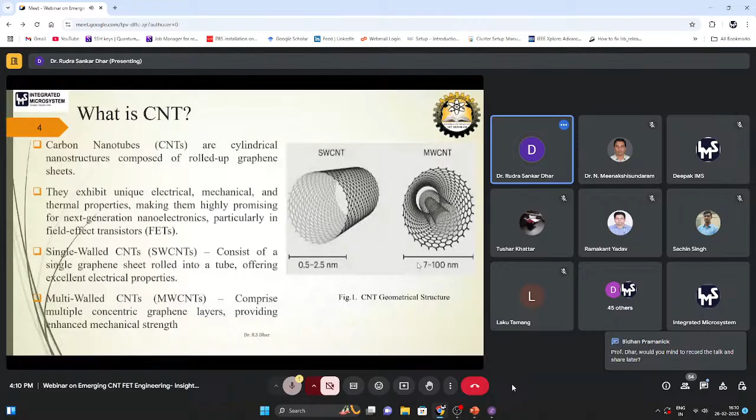CNT FET. So a special feature of this molecular structure is that it is expected to have good ballistic transport because it has nanowire dimensions, and scalability is quite good. So we can scale down the material-based device to a shorter gate length. It is obviously giving a high electron mobility. It has faster switching speed, low power consumption, and good thermal conductivity as such.

So basically, considering the device properties and so on, we can say that CNT is a good material to be utilized as a field effect transistor, and therefore people have also recently been looking into CNT as an option for alternate silicon materials and things like that. So we figured this out as an alternative option, and therefore we were thinking to design the FET using QuantumATK as the software, because in QuantumATK the good part is that we will be able to do some molecular dynamics and see how the featuring is happening.

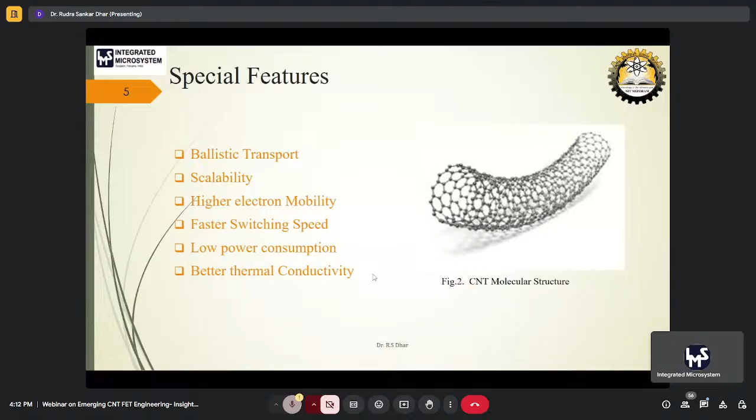So coming into the material as a device, this can also be used as a sensor. So CNTs have defects at the side walls and the end caps that allow gas molecules or different types of molecules to be adsorbed. So adsorption is possible with CNTs. The resistance of CNTs changes when gas molecules adsorb on the surface, because the molecules will be adsorbing on the surface, so the resistance of the material as a whole changes.

And therefore the chemical groups of different molecules, like for example some biomolecules, or something like DNA, cellulose, and those types of molecules, can also be added on the CNTs. So there is a high probability that the CNT can work as a good sensor, like a biosensor, bio CNT FET or something like that. Thus the CNT is basically a multiple adsorbing site material. It is chemically inert. It is biocompatible obviously, because biomolecules can also be adsorbed.

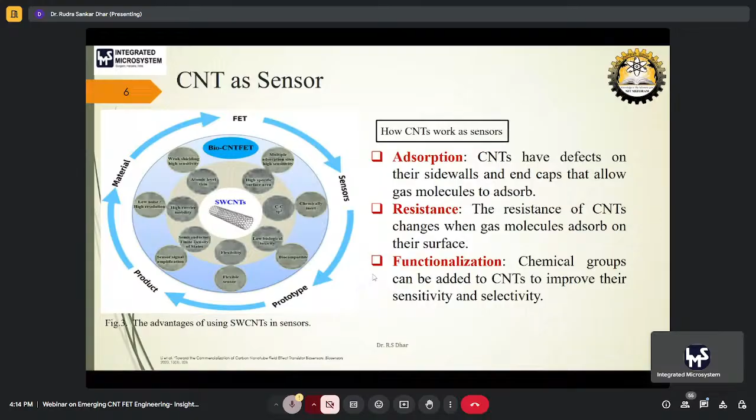Also, CNTs have low biological toxicity. It has high flexibility, because it can be bent and turned either way to a great extent, in comparison to silicon, which is a hard crystal type of material. So CNT is expected to have better flexibility, and therefore we were looking into this as a material for our new FET, or maybe some other types of devices which we can develop later on.

So going more into the insights of the CNT, we also looked at the chiralities. So this is what we can see over here, the zigzag type of formation of this molecular structure. As you can see clearly, it gives a zigzag molecular structure with (n,0), and theta is at 0 degrees. So n is a multiple of 3 in this case, and in this case the CNT is metallic. Otherwise the CNT will be a semiconducting material. So we can choose based on the type of molecular arrangement in the CNT, and this arrangement can be optimized using this software.

So we have the option to choose what type of molecules we are using, and what type of arrangement of the molecule we actually want, because it is a molecular dynamics based software, so we can choose it accordingly, and therefore we can acquire which type of CNT we want to use for our device.

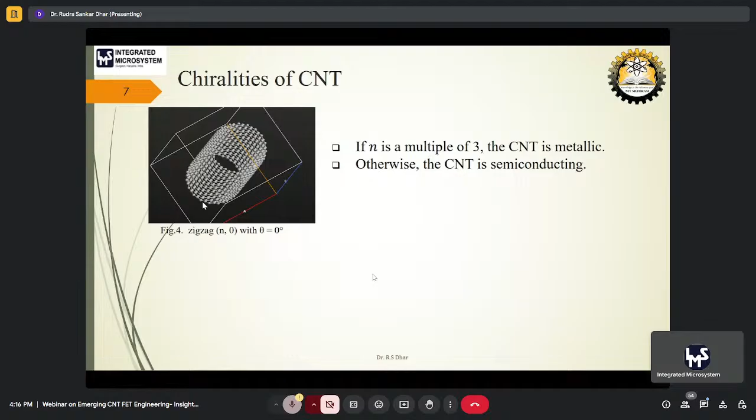So this is the picture of a band structure. As you can see, in this case we have chosen the N0 option for 19.0. So with the 19.0 option, this is the band structure and this is the diameter of the CNT that we get, which is 14.9 angstrom. So that is the total diameter of the tube with the 19.0.

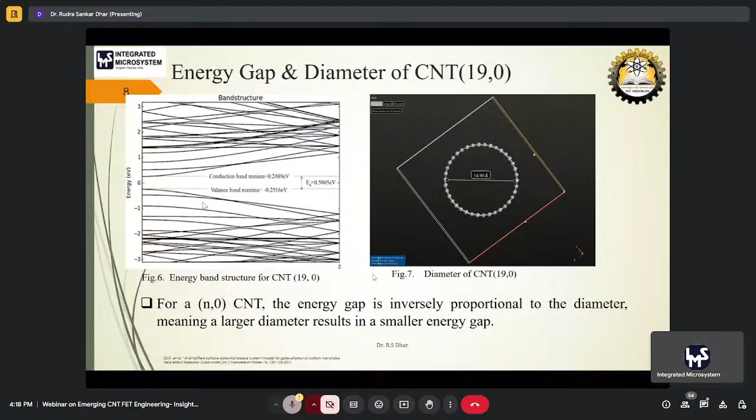If we increase the N0 more, the diameter of the tube will increase. Whereas if we decrease it, say for example 13.0, then the diameter will decrease. So again, this we can choose easily and select based on our requirement and the type of option that we are looking for in our device. So the energy gap will vary accordingly, and therefore we can get the CNT based on the diameter of the device.

So these are the corresponding structures that you can develop. With 19.0 we have the widest option, where we are seeing the variation of band gap with respect to photosensitivity and the subthreshold swing for different N0 combinations of the CNTs. So the highest, 19.0, is something like this, followed by 16.0. 13.0 is quite small, and then we have the 10.0 over here, where the photosensitivity is quite high, whereas the subthreshold swing is quite low. So now it depends on what type of option we are looking into.

If we want the CNT to work as a more photosensitive material, we have to choose accordingly. And if we are looking for a lower subthreshold kind of CNT, accordingly we can choose. And these are all for the zigzag CNTs, that is the curvature options. So we can choose accordingly.

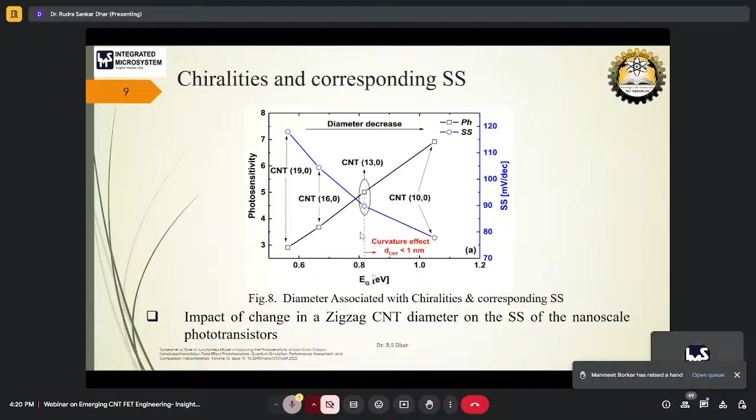But as we were looking into the CNT FET, we considered the CNT as 19.0, so that we can have a less photosensitive material, whereas we can go for a medium kind of subthreshold swing. So considering that particular scale, we considered the material, and thereafter we went ahead to see how it is varying.

And also, as I said, the diameter size changes based on the chiralities. That is what we can see from this graph also. This is what we are getting: the threshold voltage change with increase in diameter of our tube. If the diameter is increasing, the threshold voltage is decreasing to quite an extent, an exponential decrease, as we can see.

So we should have the diameter accordingly. We cannot go for a very small option, because the threshold voltage of the device needs to be optimized for a FET. So we went for 19.0, which is giving a threshold voltage of around 0.3. Okay. So next.

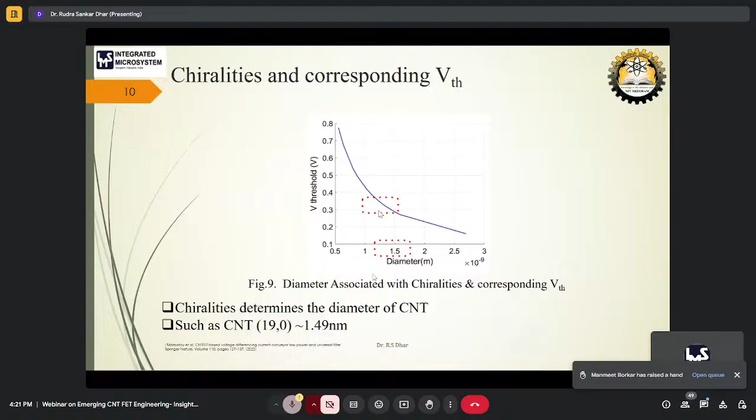So initially we developed the channel based on the CNT we want to take. In this case, we chose the 19.0 option of chirality, and therefore we took the channel region, the CNT tube, demarcated the source and drain electrodes based on the lengths that we wanted, and thereafter did the oxide and the metals on top of the quantum CNT.

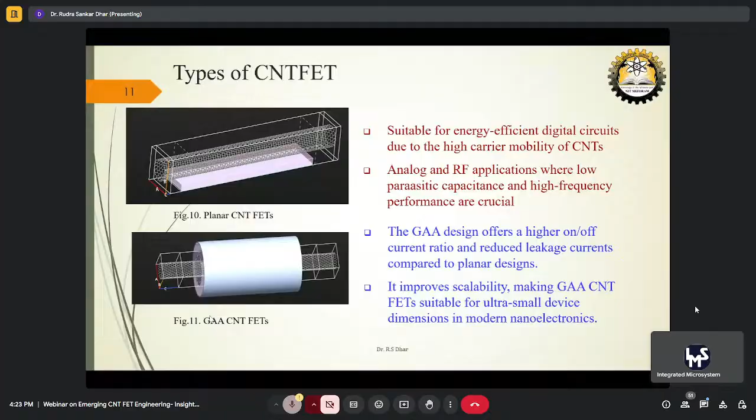So, the difference between the normal CNT and the silicon MOSFET. As you can see, this is the basic difference. Structurally, it looks quite similar. Instead of the silicon channel which is formed, we are having the CNT FET in this case. And as we are applying the gate along with it, the energy band diagram at normal condition is given.

So in CNT FET, we are actually having a Schottky barrier contact. Current is controlled by modulating the Schottky barrier at the metal-CNT junction. MOSFET-like CNT FET can also be developed if we are doping the CNT regions to reduce the Schottky barriers, and that can easily be done. So CNT FET can also be doped to reduce the barrier, and therefore it can also perform like a MOSFET type of device. That is what we see over here.

In case of a MOSFET, we are actually applying the bias to make the device N channel or P channel, whatever it is. So in this case, with an N channel MOSFET, basically we are depleting the channel region, and this can be done if we are doping the CNT with a similar type of material combination, so that with the doping it will act as a MOSFET.

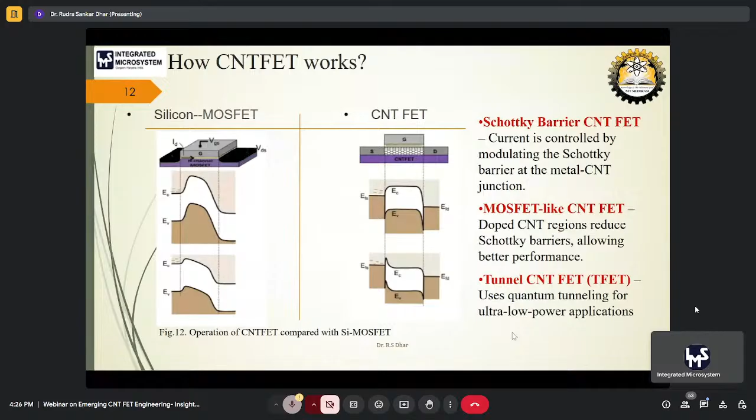Also, the CNT can work as a tunnel FET by using quantum tunneling for ultra low power applications. That can also be possible by using the tunneling option. So we can basically use CNT FET as a MOSFET also. So that also is a beneficial part of working with this CNT.

So the electron density formation is given something like this. As you can see from the picture, the geometry. We have the central region, which is covering the extension of the two electrodes, the left and right electrode. That means basically the source and drain electrodes are extended, and also we have the channel region in between the extensions, and finally the extended left and right electrodes are the source and drain electrodes of the GAA device.

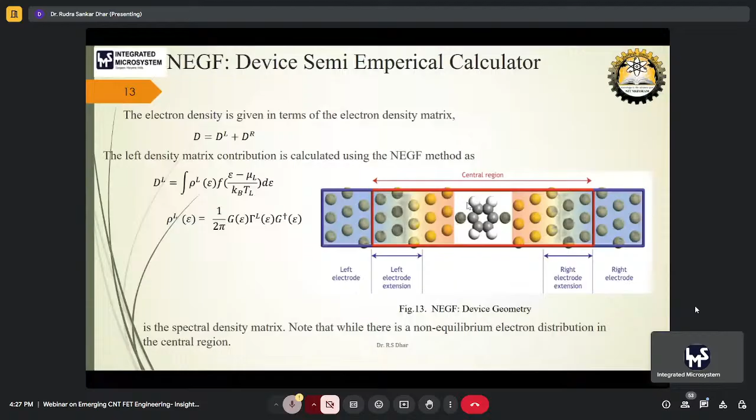And this central region covers the extension of the source and drain, and also the channel region at the central part. The full channel region is the CNT, and that is giving the spectral density matrix, and a non-equilibrium electron distribution is generated when we are applying it through our software, and therefore the molecular structure we can see over here.

The output behavior of the CNT at (19,0) for the 30 nanometer gate length is somewhat like this. Variations are shown for the different CNTs' ID-VG characteristics. As you can see in figure 14a, the differences of the ID-VGs are shown: (10,0), (13,0), (19,0), (25,0), and so on. As we are increasing the diameter, we are seeing a rise in the on current and also a rise in the off current. For (25,0), the off current is quite high. That is why we did not consider it; we went for the (19,0) option, which has a moderate off current and good enough on current.

And this is the ID-VD characteristics. That is what we see in the ID-VD characteristics, the output characteristics for a 30 nanometer gate length GAA CNT FET. The chirality again is the (19,0) option, which I guess is a better option and gives better results compared to the other alternatives.

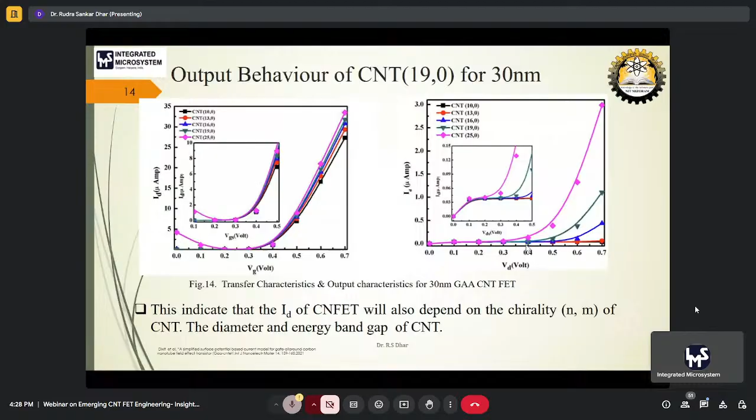This is the analysis of the IDVD characteristics. The normal GAA CNT FET, then GAA CNT FET with ammonia doped and with nitrogen dioxide doped. So these are the three IDVD characteristics that we can see over here.

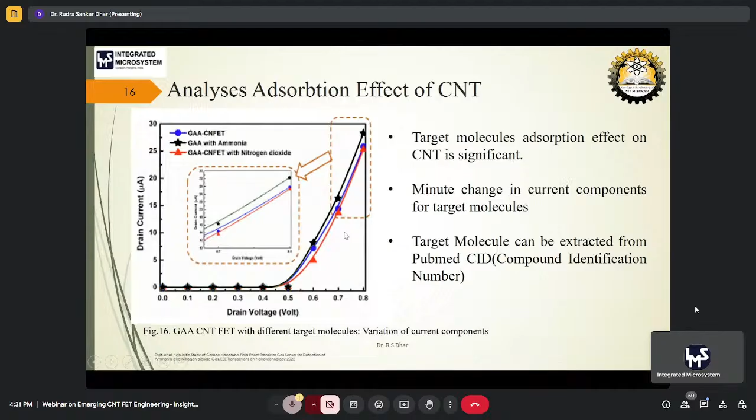So this is how the sensing is going on. Amino acids are passing on as the sensitive element on the CNT, and thereafter it gives the electrical signals. The results show changes in the current and the conductance due to alteration in the geometry and aromaticity for the single walled carbon nanotubes. We have not tried the multi-walled as of now, but we are working still on the single wall CNTs.

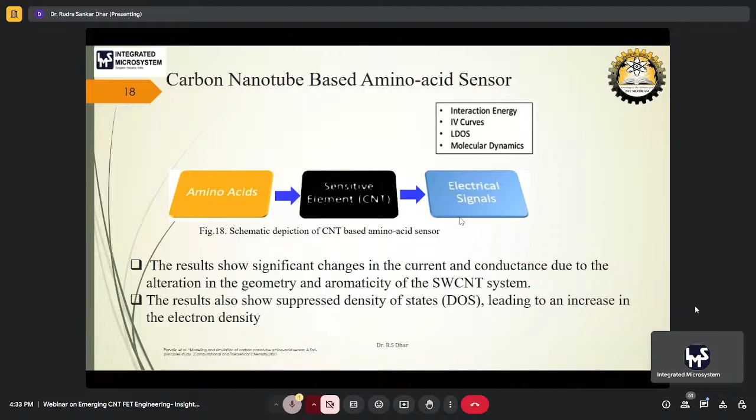So the results also show suppressed density of states leading to increase in electron density, which is actually required to have a higher on current, and so as to have a better on-off ratio for the device to increase the sensitivity of the particular device. So that is required, and we are getting it to some extent on this. So we are able to match the things quite well as of now. It can be used as a biosensor also.

So the target molecules are applied as adsorption effect on the CNT is quite significant. So as you can see, this is the channel region where the cancer cells or the molecules we can target on it, and therefore it can be established as a biosensor for CNT FET.

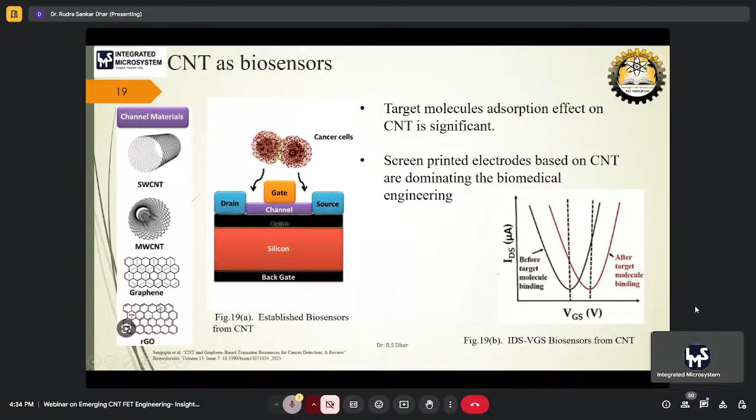And this is the IDVG characteristics with the target molecule and before the target molecule binding. So you can clearly see how the shifting in IDVG is expected, and this is what we are getting with the single walled carbon nanotubes. For multi-walled, it is expected to be a bit better with better sensitivity and so on. But still, we need to figure those things out.

The objectives as of now had been to optimize the doping to possibly achieve higher on current, optimize the possibility to achieve lower off current, and also improve switching characteristics and ensure compatibility with the targeted applications.

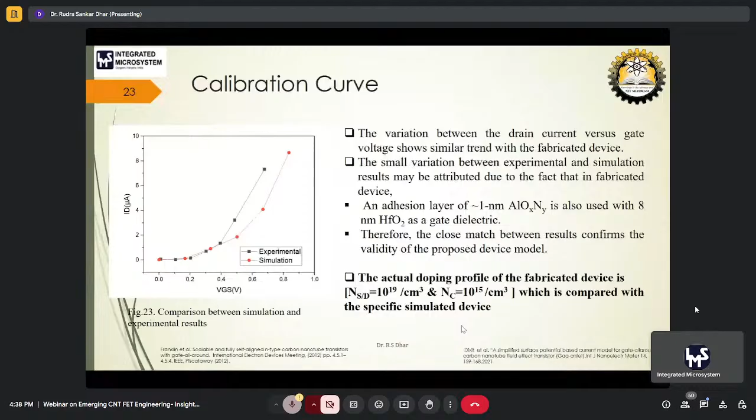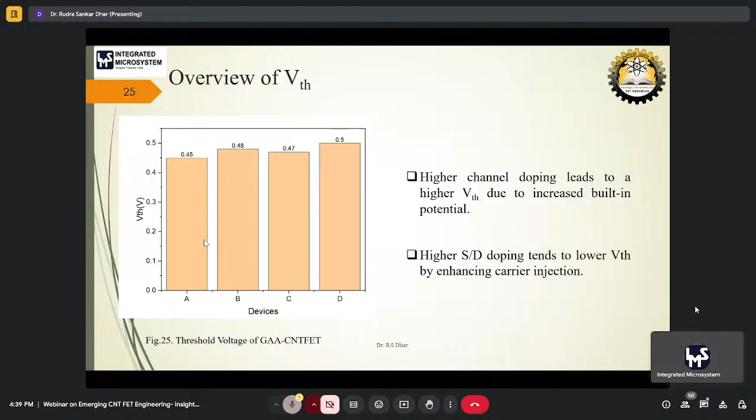So this is the threshold voltage variation based on the 4 devices. What we can see is that 0.45 is the lowest threshold voltage that we are getting for our device A. So higher channel doping leads to a higher threshold voltage due to increased built-in potential. Higher source drain doping tends to give a lower threshold voltage by enhancing carrier injection.

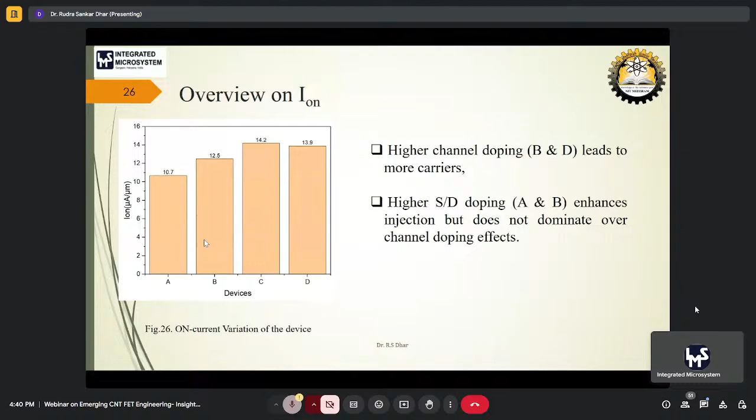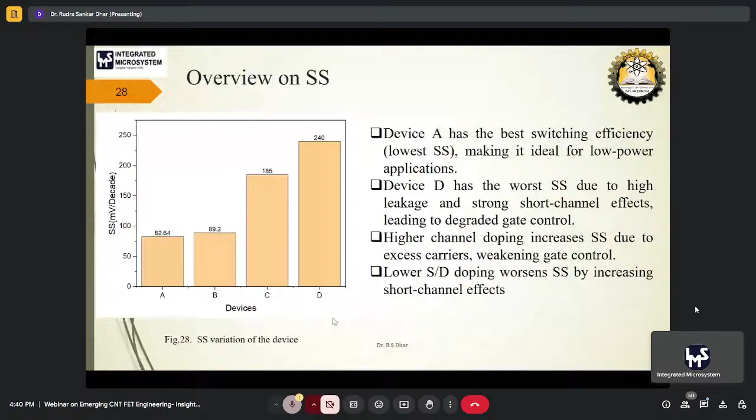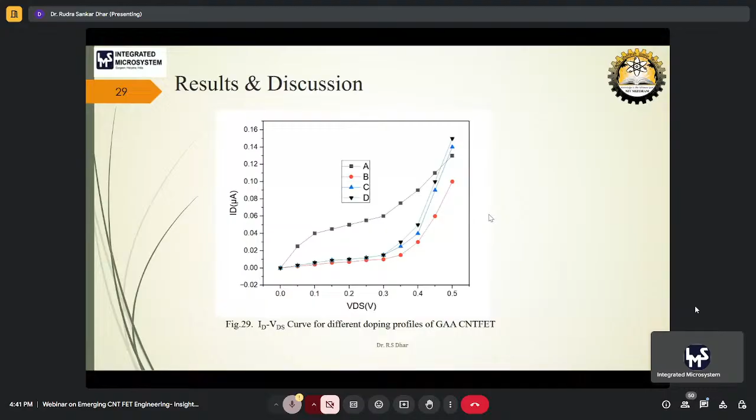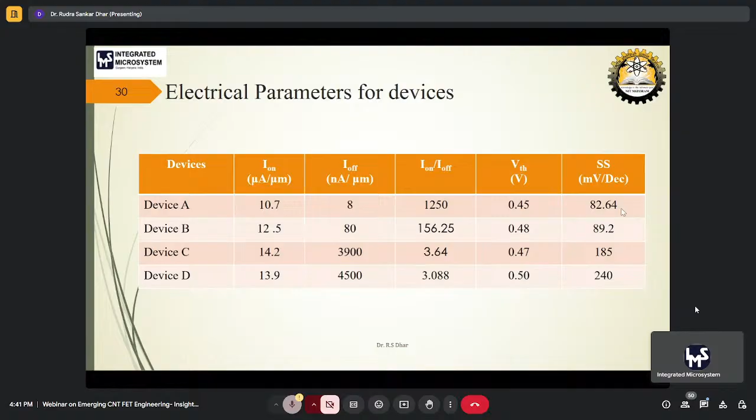This is a table showing all the different parameters that we have done. As you can see, the threshold voltage is quite similar for all the 4 devices, whereas subthreshold leakage is best for A, and that's how the thing is.

So the gate all around CNT FET are investigated, and we are still working on these types of devices to probably make a sensor type of device, and that is probably the better option to use CNT FET for future.

Considering QuantumATK as a software, obviously it is giving good results, which is expected, and giving selective doping, we can control the CNT as it is supposed to be. We are able to reduce the scattering effects in the material. We are able to do the adsorption on CNTs, using some molecules and something like that. For example, for doping, we have used phosphorus as the material. So these types of things can be done quite easily.

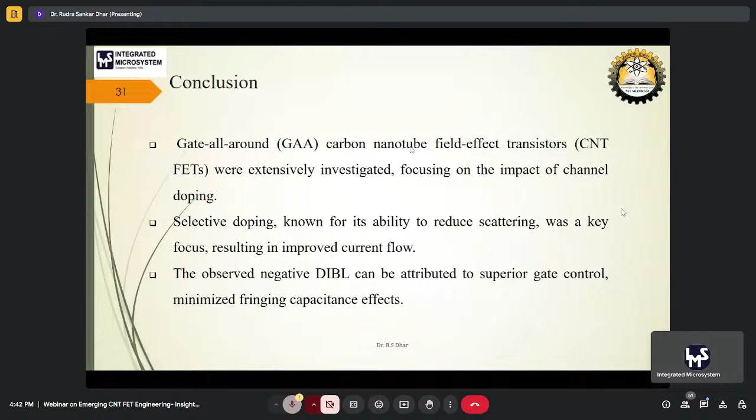The observed effect is due to gate control, and fringing capacitance effects are also observed. So some references, and that's all. Thank you, any questions please?

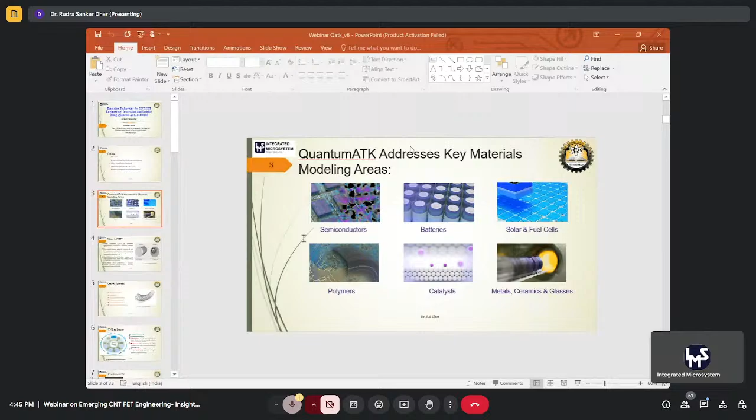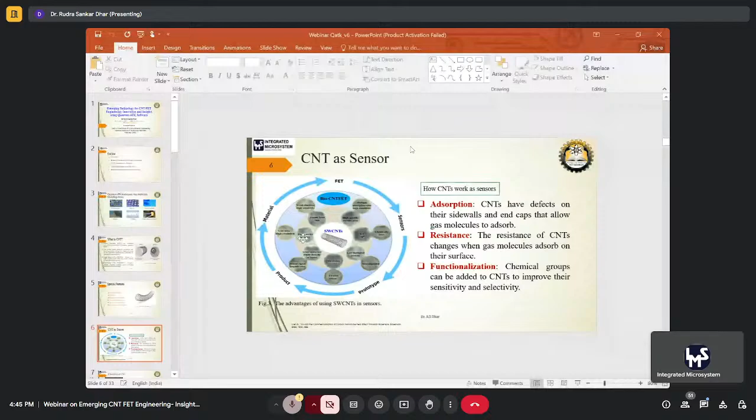The sensitivity is quite good enough. We are able to do the gas sensing, and also biosensor devices. As of now, we are working on developing biosensors mostly for cancer cell detection and so on. The sensitivity is quite at par with what we are getting outside - that's why I showed that experimental calibration curve. So it is quite good, in fact.

I have a question. This threshold voltage is close to 0.4, no? When we compare in this VGS.

For this particular device, it is like that, but it depends on the device again. Typically, will we be able to observe sensitivity in this case? Because now the experimental and simulation results are matching only up to 0.4, which is something like a knee voltage, right? Beyond that only we may be able to see some effect.

For using CNT, that is part of the CNT property, because CNT is a material where it operates at a very small range. So obviously we have to consider something at that range only - say, 0.4 to 1 volt or something like that, because it operates at a very small range. That's the material property. Maybe if we use a different chirality, we can see a different range.

I also see that in the four cases further down the slide, number 30 or 29, case A, as you mentioned, shows a very good result. Probably if you tune your parameters a bit, I feel like you are seeing some sort of resonant-like phenomena, resonant tunneling-like phenomena.

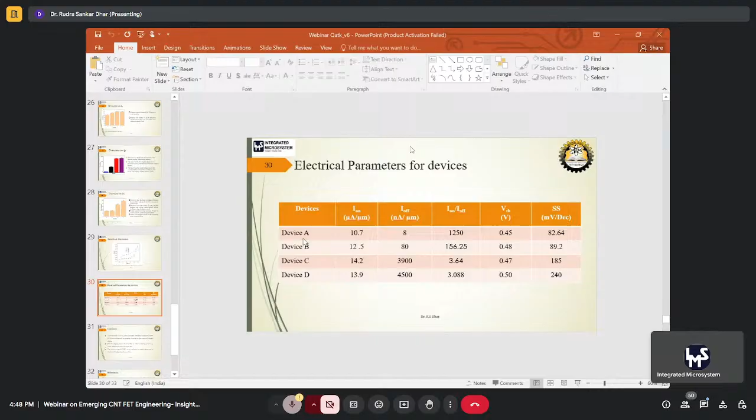Yes, I am also expecting something like that. That is a thing we will obviously be looking into. That's very evident from the graph actually, around that 0.2, 0.3 region.

If you zoom a little, sample your NEGF calculation a bit more, in the tight-binding approximation, and look at the transport property a little closer - I think it's clearly, as you mentioned, distinct from all other cases. BCD is distinctively different.

One more thing - in these simulations, Synopsys is now working with TCAD for people, since they now have both DFT results which can be straightforwardly connected to microelectronics. I think as DFT people, we may only be in a position to give a qualitative answer in terms of matching with experiments. That is matching very well in your case actually. Exactly, the quantitative part is playing around with the pseudopotentials and hybrid functionals.

Eventually our results will match with the experimental results. Correct, very correct. Yeah, it's good, it's very good work.

I am interested in looking at the optoelectronics aspects of these CNTs. If we work with this software, this will be really good. Say, for example, if we look for developing a solar cell or a laser, also quantum laser or something like that, it will be a good option for using this material, because CNT is a very new material. Very few people have worked on it so far. So we are also cultivating the options of what can be done and what further options we can go into.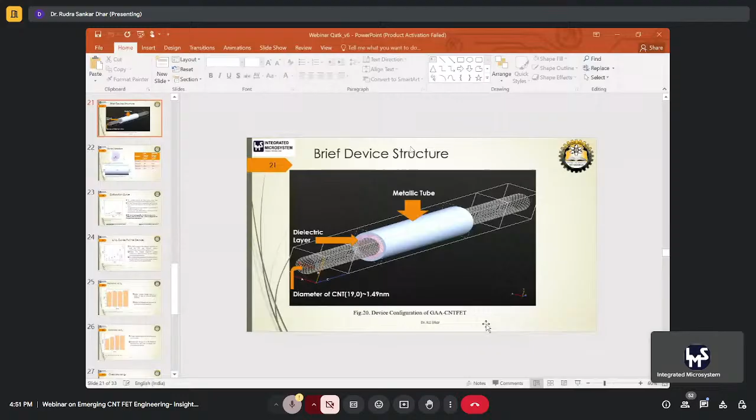I would like to ask, could you please go through the device structure slide? Exactly, not this one, another one, that is another one in the slide I have seen. Previous slide, please go through the previous slide. Right, this one, sir. May I know how to prepare this kind of device structure?

It's a gate, silicon oxide, and there are some other channels. Could you give some outline on how to make this channel, which is basically your CNT in this case? You apply the oxide, whatever oxide, and the whole thing, in this case, was made on a silicon device, silicon material. So on the silicon wafer, we choose the silicon wafer. On top, we are applying the oxide to make the buried oxide kind of thing, and thereafter we are putting the CNT as we place it.

Thank you for the information. Thanks.

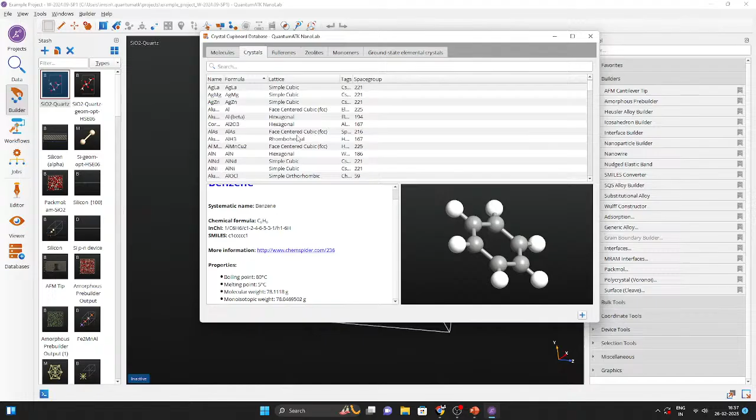So you can see these are different kinds of crystals with different lattice groups like face-centered, body-centered, hexagonal, simple cubic, orthorhombic. So all these things we have, and also you can see these are the fullerene materials, and it also comes with the zeolite materials. Like you can see these are the zeolite materials, and it also comes with the monomers for polymer simulation, and it also comes with the ground state elements.

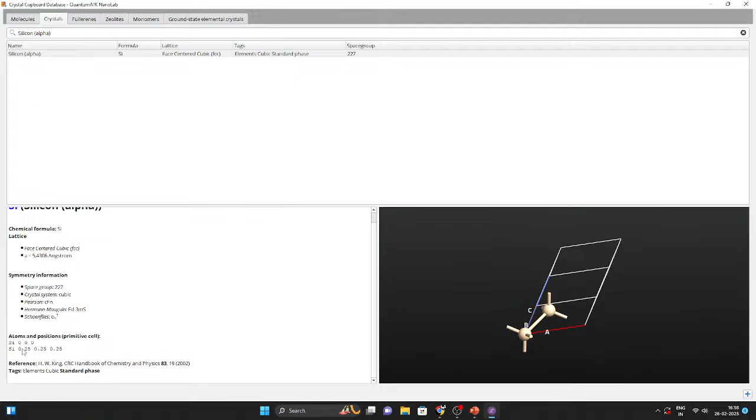So basically this is the local database, and here if you want to import some material into your builder, you can search the material first. Like you can see this is silicon alpha. Here you can see this is the chemical formula, this is the lattice information, this is the face-centered cubic structure, and here you can see this is the symmetry information. And here we have the atoms and the Cartesian coordinates.

If you want to import this material, you need to click on this add option. Now you can see the material has been added in the stash, and this is the 3D view. So this way we can import the material from the local database, and if the material is not available, then you can go with the online database. So in the online database, you can see we have the Crystallography Open Database. We also have the Materials Project, and here you can see we have the periodic table.

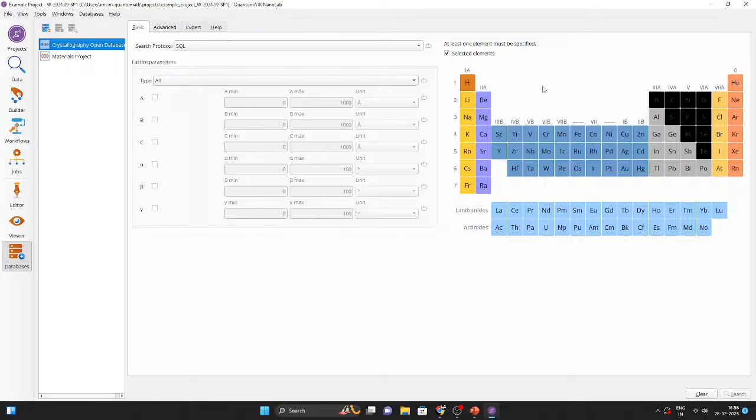So whatever material you want to import, first you need to select its elements. Like you can see, I would like to select hydrogen and oxygen. You can see two elements have been selected. Now we need to click on this search option. Then it will search every possible combination of hydrogen and oxygen from the Crystallography Open Database. Here you can see it is searching the database, and it has found a total of 39 structures with different crystal types. Like you can see this is the simple tetragonal structure, and this is hydrogen peroxide.

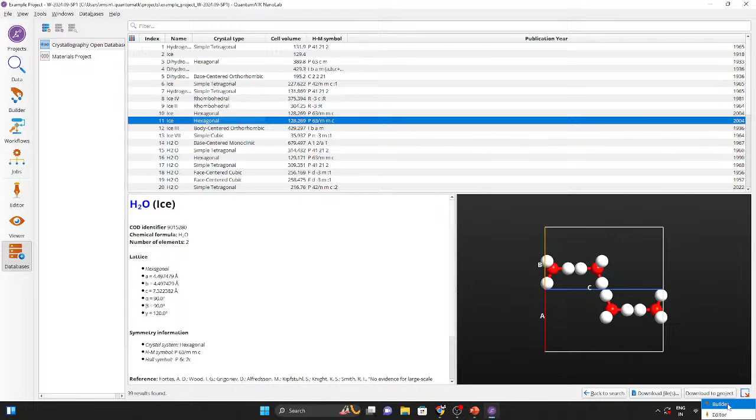So as per your need, you can choose the material. If you want to import H2O or some other material, you need to click on this arrow and go to the builder. Now you can see the material has been added in the stash.

And suppose the material that you want to work with is not available either in the local database or in the online database, then we have the plugin toolbar. So in the plugin toolbar, you can see we have the Crystallography Open Database that will help you to import. Basically, we need to enter the COD identifier number. So this is for crystals, and we have the PubChem database. This is for molecules. You can also go with the link.

So this is for the molecule, and here you can see we have the nanotube builder, and here we have the crystal builder. So if you want to work on any new materials, then you can use this crystal builder. First, you need to define the space group. Like you can see, we have the triclinic, monoclinic, orthorhombic, tetragonal, trigonal, hexagonal, and also the cubic structure, like the face-centered cubic structure and also the body-centered cubic structure.

So once you define the space group, then the lattice will be automatically selected. We need to define the a, b, c values and the alpha, beta, gamma values. Then we will go with the element and the fractional coordinate point. So let me select a face-centered cubic structure. Now you can see this is the face-centered cubic structure, and here you need to enter the experimental value.

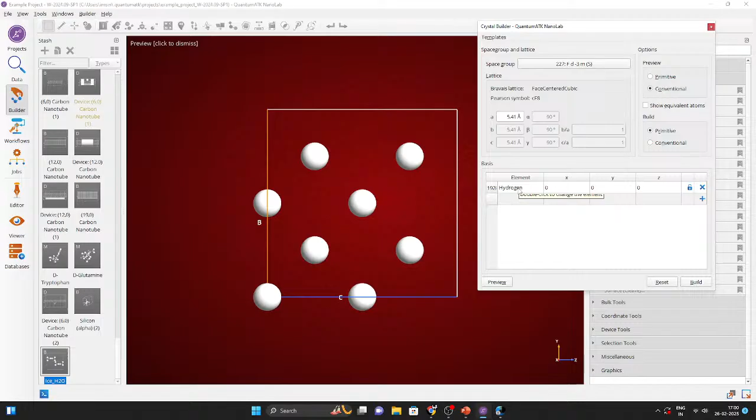Like you can see, I would like to take 5.41 angstrom, and you can see this add option has been enabled. So we need to click on this add option, and then we have the various fractional coordinate points. So I would like to go with the XYZ, and here you can see this is the default hydrogen element. If you want to change this hydrogen, we need to double click, and you can see these are the list of elements. So I would like to select this gold.

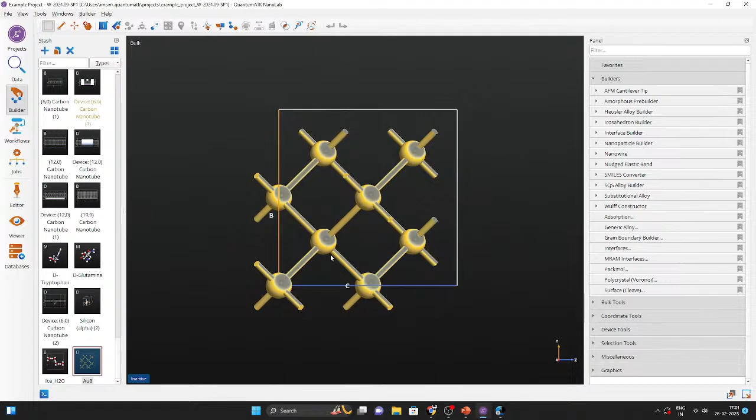Now you can see hydrogen has been replaced by the gold material, and here you can see this is the preview option. Here we have the primitive cell, and we also have the conventional cell. So this is for preview, and this is for building the structure. So here you can add n number of elements, there is no limitation, and once you're done with the crystal builder, you need to click on this build option. Now you can see the material has been added in the stash, and this is the 3D view. So this way we can create any kind of material.

So let's focus on the nanotube structure. So here you can see this is the nanotube builder that will help you to create any kind of nanotube. Either it could be a carbon nanotube, you can also create a MoS2 nanotube, SiO2 nanotube. So any kind of nanotube we can create by using this nanotube builder. Here you can see we have the chemical properties. Here we have the carbon at site A, carbon at site B. We can also modify the bond distance. Here we have the inner tube, center tube, and the outer tube. So multi-wall nanotubes we can design by using the nanotube builder.

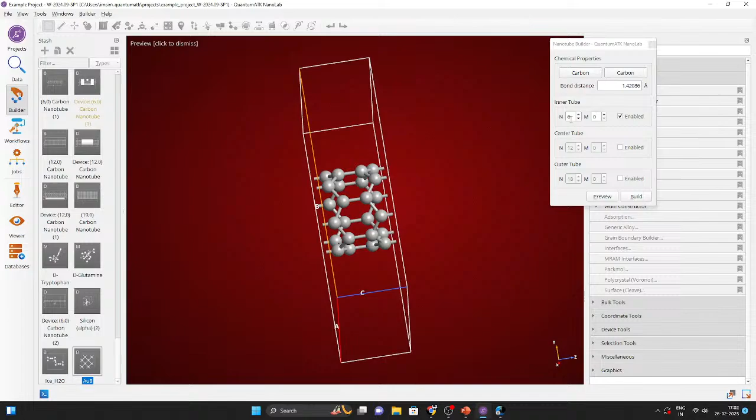So if I select this preview, this is the default option, and here you can see this is the inner tube that has been selected, and here we have the chiral vectors n and m values. You can see n is equal to 6 and m is equal to 0. You can also modify the chiral vector as per your need. If you want to enable the center tube as well, we need to enable it and click on this preview. So you can see we have the inner tube and we have the center tube. If you want to add the outer tube as well, you need to enable it and select this preview. So you can see inner tube, center tube, and also the outer tube. So this is the multi-wall carbon nanotube.

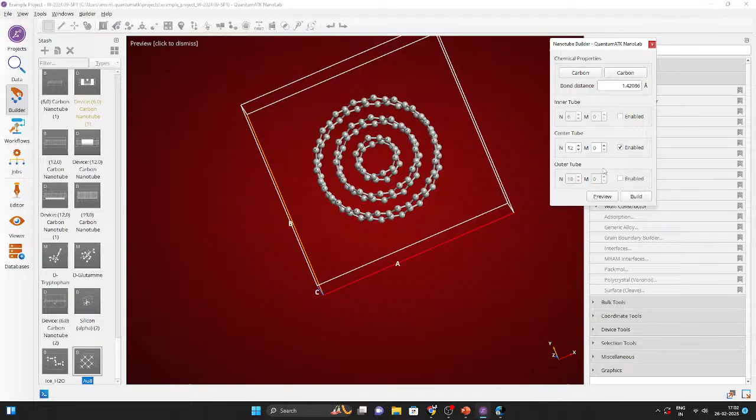Now if you want to work on a single nanotube, I would like to go with the center tube. You can see the center tube has been enabled. Select this preview. And once you're done with this nanotube builder, you need to click on this build option. Now you can see this nanotube has been added in the stash. This is the 3D view. And now you can see this nanotube is quite thin. So if you want to increase the length in any direction, either direction A, direction B, or direction C, then here you can see we have the advanced panel toolbar.

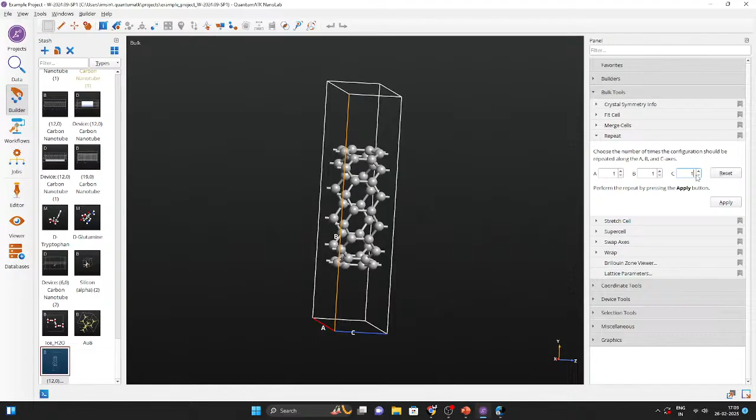So these are the building tools, and here you can see we have the bulk tool. In the bulk tool, you can see we have the repeat option that will basically help you to repeat your structure in any direction, either direction A, direction B, or direction C. So I would like to repeat in the C direction. You can see this is the C direction. I would like to enter the value 10 and select apply. Now you can see the nanotube has been increased 10 times in the transport direction.

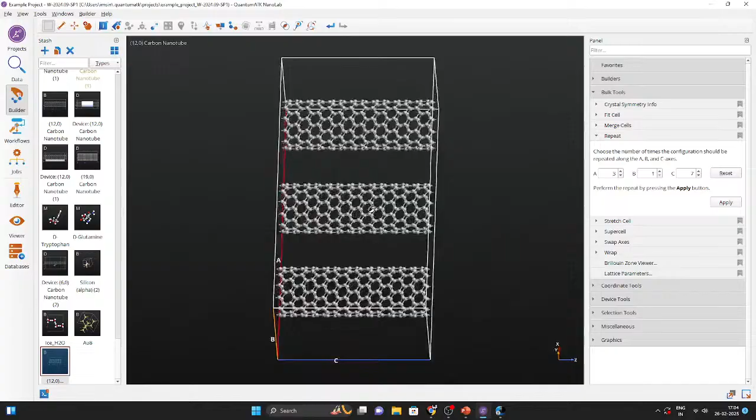And if you want to create an array of the nanotube, then here you can see we have the redo and undo option as well. Now I would like to take 3 times in the A direction, 1 time in the B direction, and 7 times in the C direction, and then click on this apply. Here you can see we have created an array of nanotubes.

Now if you want to convert this structure into a device, you can go to the device tool, and here you can see we have the device from the bulk. So this is our bulk configuration. If you want to know the information about any structure, you can click on this I tab, and in the I tab you can see this is the bulk configuration. This is the total atoms, this is the lattice type, this is the unit cell, this is the primitive vector, and also you can see this is the density of the unit cell.

Now if you want to convert this structure into a device, you can go to the device from the bulk. So you can see this is the device builder. Here we have the left electrode, right electrode, and this is the center region. This area is called electrode extension length at the left side and the right side. This basically helps you to reduce the scattering between the electrode and the center region.

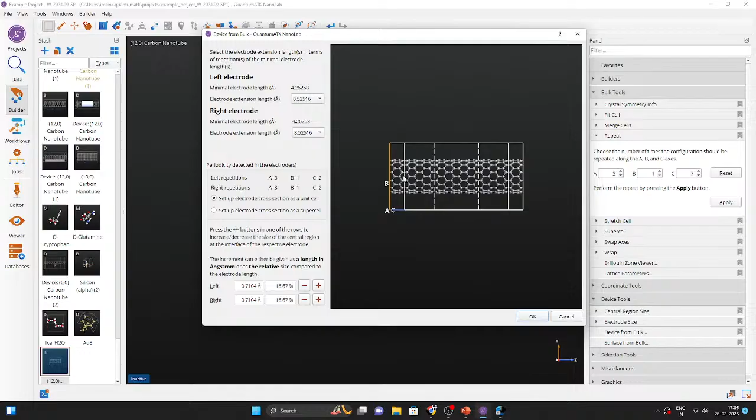If you want to add this electrode extension length, here you can see we have the option that will help you to add. And if you want to go with the default option, then you need to click on this OK. And if you also want to increase the buffer in the left region or right region, here you can see we have all the options, whether you can increase or decrease. So this is the device that I have created for this nanotube.

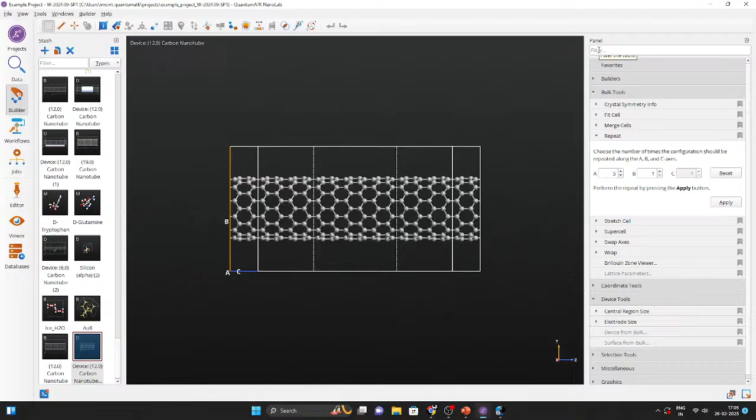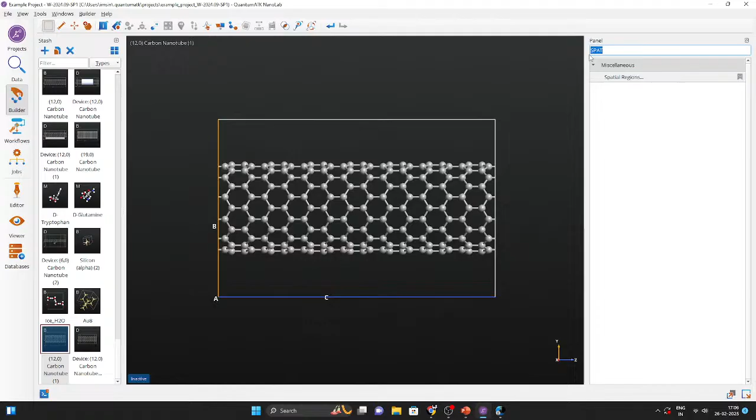Now if you want to add the gate, like the dielectric substrate region, metallic gate region, source and drain, then you can go to the spatial region. Here you can see this is the spatial region. And before spatial region, if you want to know the vacuum space in direction A, direction B, direction C, you can select this nanotube bulk configuration and go to the lattice information. So this is the lattice parameter. Here you can see this is the vacuum in the direction of A, direction B, and direction C.

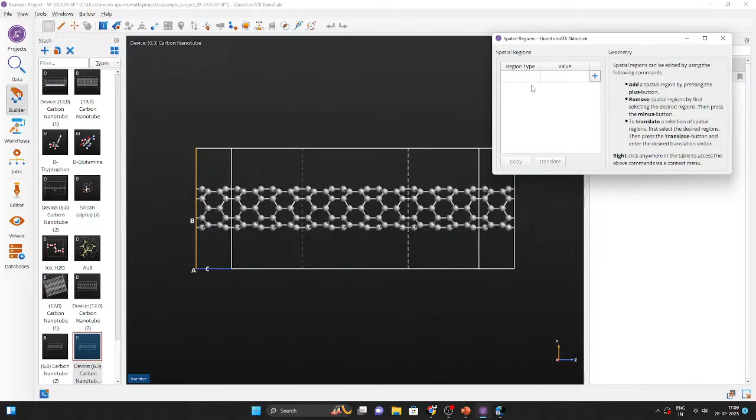So, sir, basically, we need to change their value, then it will become gold or graphene or something. Let me cover this one. Okay. For metal value, for example, is in voltage, negative voltage or positive voltage, that we need to define in the value option. So here you can see this is the region type, and we need to click on this add option. And here you can see this is the metallic region. If you define the value for the gold material, then it will become a gold metallic.

And suppose I would like to take a dielectric region, and if you want to define the dielectric, SiO2, yes, 3.9 epsilon naught, for example. That value we need to give and define. The metal value has been given. Okay, so by changing the value of the metal, we can make it like gold or something, SiO2, something that you can define.

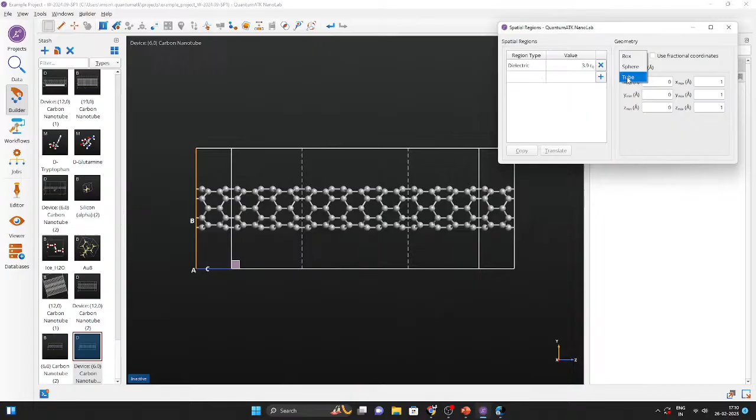So I am selecting this dielectric substrate region, and here I need to change the value. So for the SiO2, I would like to put 3.9, and here we need to go to the geometry option. In the geometry, you can see this is the box, we have the sphere, we have the tube. So we have created a nanotube, so we need to select this tube option, and here you can see we need to define the start point for the direction x, y, and z, and the end point for x, y, and z. And here we can also define the inner radius and the thickness of this dielectric substrate region.

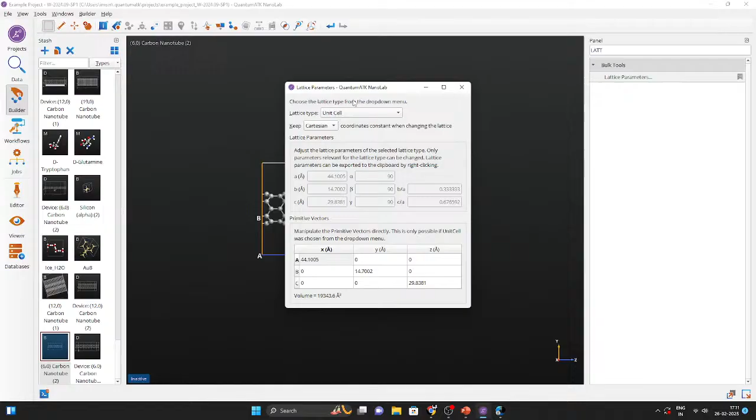So if you want to know the value for this end point and the start point, you can go to the carbon nanotube, the bulk configuration. Here you can select the lattice. Now you can see this is the lattice value in the direction x, y, and z. So this is the spatial region I would like to add in the device. And here we need to change the start point and also the end point.

So I would like to go with the spatial region, and my starting point will be 0, and here the ending point will be 44.1005 in the x direction, and also in the y direction. I would like to take 4.

Sorry for the interruption. One more thing is that it is lateral. We know that NEGF formalism means lateral CNT. But is there any provision to put vertical CNT by maintaining the same NEGF calculation structure? So sir, for this vertical CNT, we need to rotate the tube. So we have the option here. You can see, if you want to design a vertical, so this is the horizontal.

If you want to take a vertical nanotube, you can go to the rotate option. Here you can see this is rotate cell, rotate atoms, and we need to define the angle and also the rotation axis. So if I take 90 degrees in the direction x, and then you can select apply. Now you can see the tube has been rotated 90 degrees in the x direction. Perfect, thank you. So this way we can create.

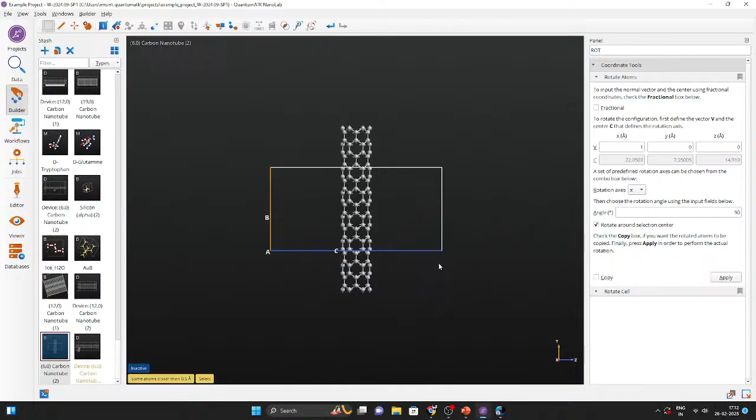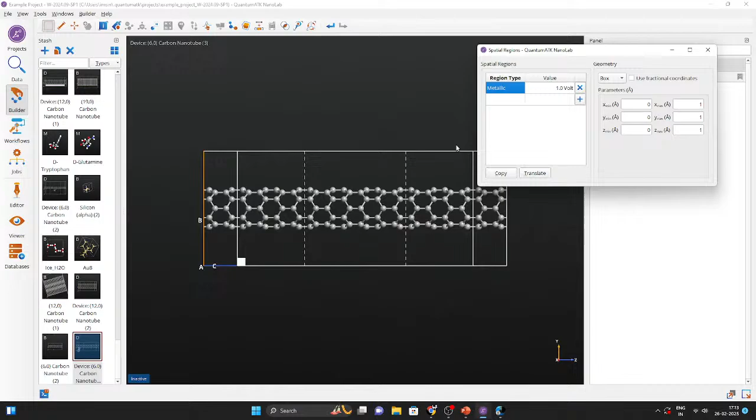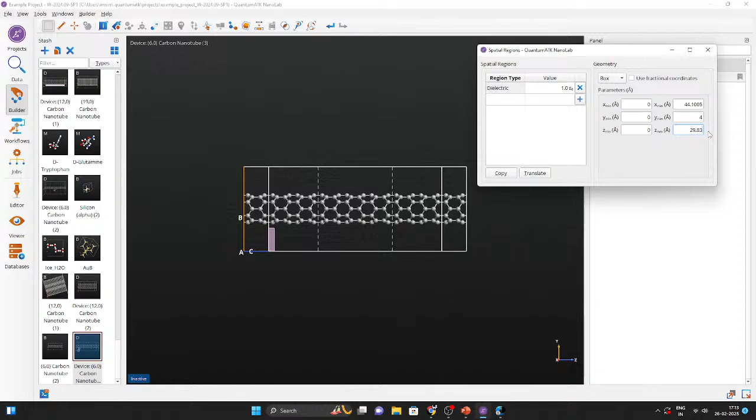So here, let me cover this one. So this is the tube. If you want to select the box, now let me cover the box. And this is the dielectric substrate region. This is the metallic, this is the dielectric. And we need to define the parameter in x, y, and z. So for the x, I would like to take 44.1005. In the y direction, I would like to take 0 to 4. And in the z direction, 0 to 29.83. Now you can see this is the dielectric substrate region that we have added.

Now if you want to add the metallic region in this structure, again we need to select the option. Sorry, here I would like to take 3.9 for the SiO2. Yeah, this is the metallic region, and again we need to define the region. So in the x direction, I would like to take 0 to 44.1005, because this is the vacuum in the direction of x. And 0 to 14.7002 in the y direction, and in the z direction 0 to 7. Now you can see this is our

Hello. One more question, last but not least. Gold can be found in the periodic table, Au is there, but a gold nanoparticle is completely different from conventional gold. Can it modify the surface of the bare CNT you have taken, by gold or any other metal nanoparticle? Doping or selective doping is something different, but coating is different, because we can take n-type and p-type doping from QuantumATK as well, from the upper spatial region. I am not asking about doping, but can we coat the surface of the CNT? Is there any provision like that?

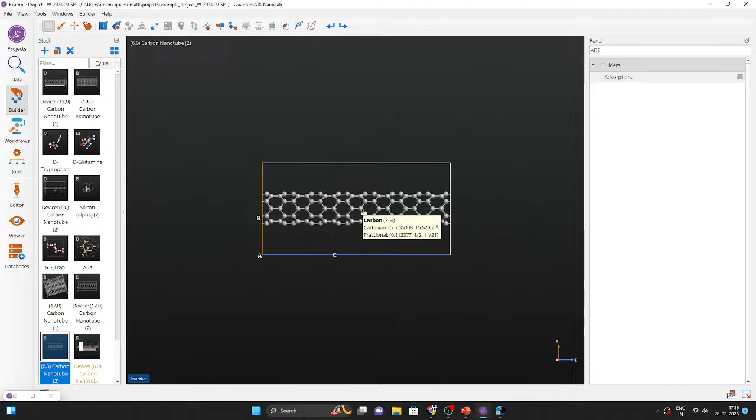So first you can create your nanoparticle, then you can create your nanotube, and then you can go to the adsorption settings. And here you can see we have load from file. Basically, we need to import our nanoparticle structure. Then it will create it over the surface of the nanotube. So I hope your question is clear now.

Okay, yes. Thank you very much. Yeah, so let me cover this device. And after this demonstration, we will come to the question and answer.

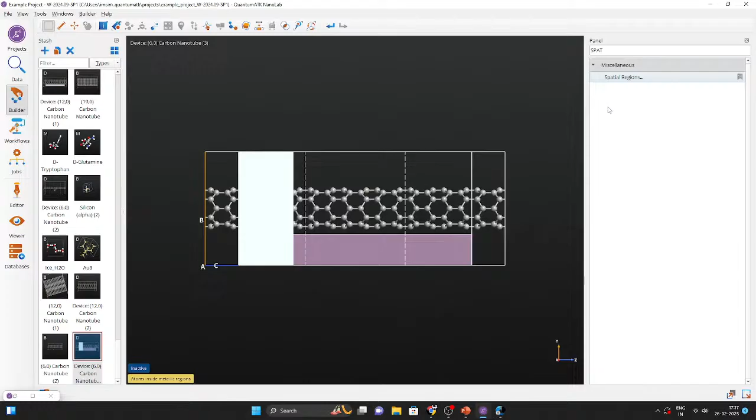So this is the spatial region that I am going to add in this device structure. Now you can see this is the metallic region, and here you can see I am putting 0 to 44.1005 in the x direction, in the y direction 0 to 14.7002, and in the z direction 0 to 7. And this is for the source.

If you want to add one more metallic region on the drain side, let me add one more metallic region. Again, you can define the positions in x, y, z, and if you want to add a gate, we need to select this metallic region. So let me add the gate material first. For the gate, I would like to set the position in the x direction from 0 to 44.1005, in the y direction from 10.5 to 14.7002, and in the z direction from 12.8 angstrom to 17.

Now you can see this is our gate, here we have added the source, and here we will add the drain. For the drain, I would like to define the position from 0 to 44.1005, and in the y direction from 0 to 14.7002. This value I am taking from the vacuum energy that I have already shown how we can calculate.

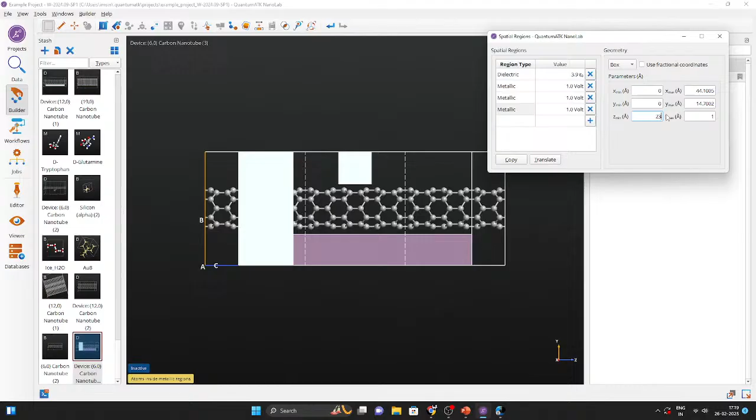And here in the z direction I would like to put from 23 angstrom to 29.83. Now you can see this is the source, this is the drain, and this is the metallic gate. So our device is ready, and now we will move to the workflow. You can see this is the device structure that we have created with the source, drain, and gate.

And now we need to define the calculator settings. In the calculator we have all the options. You can see this is the device LCAO calculator, and this is the device semi-empirical calculator. If you want to compromise on accuracy, you can go with the semi-empirical calculator. If you want higher accuracy, you can go with the device LCAO calculator. So let me select the device LCAO calculator.

And if you want to change any parameter in the device calculator, like the spin polarization or the exchange correlation functional, these are the basic parameters we need to define before the simulation. If you want to include any kind of spintronics application in your device, there is unpolarized, polarized, non-collinear, and spin-orbit coupling, and we have exchange correlation functionals like LDA, GGA, meta-GGA, and hybrid functionals, and also a custom option that will help you define your own exchange correlation functional.

These are the basis sets that we have in QuantumATK, like single zeta polarized, double zeta polarized, double zeta double polarized, single zeta double polarized. And you can also go to numerical accuracy. Here we can define the broadening temperature of the whole device. We can also define the density cutoff energy, and the cutoff energy.

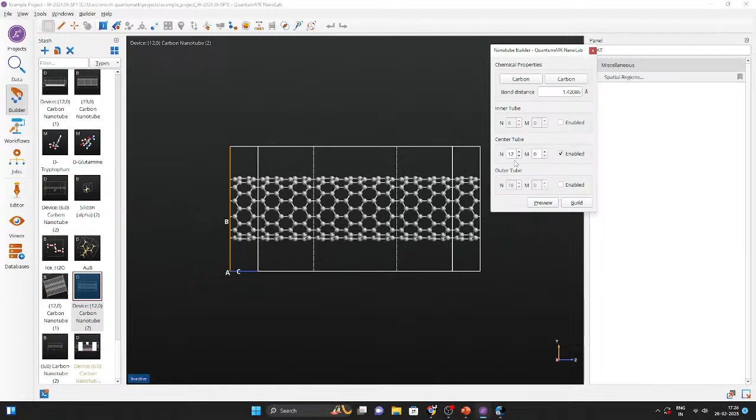Let me select a nanotube again. This is the nanotube. I would like to take 12.0 and select this build option.

Now I would like to click on this repeat option so that we can define the gate, source, and drain. So I would like to take a single nanotube. Now I would like to take here 12 times, this is the 2, and then apply. So we have created a nanotube.

Now we will convert this structure into a device, and then we will design a GAFET structure, gate-all-around field effect transistor. Now you can see the device is ready.

We need to move on the spatial region. This is the spatial region, and here we need to select the dielectric region first. Here I would like to take the SiO2, and for that I would like to put the value 3.9.

Here we need to select the tube for the GAFET, and here we need to define the start point and end point for the X, Y, and Z. So here I would like to take 9.70015.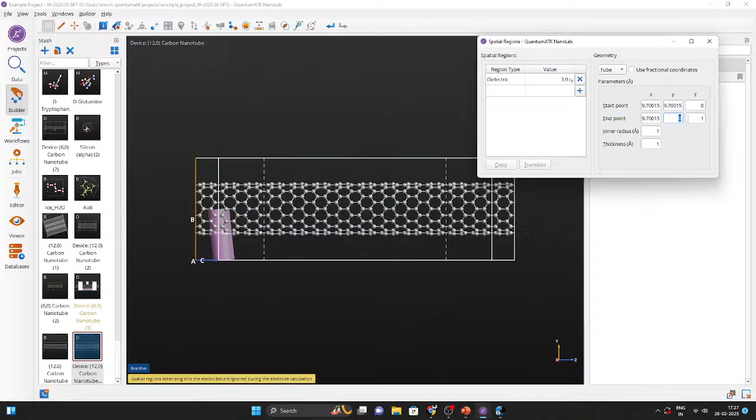So I would like to put from the starting point and ending point in the x and y direction, and in the z direction I would like to put from 8.5 to 34.2. Now you can see this is in the center position.

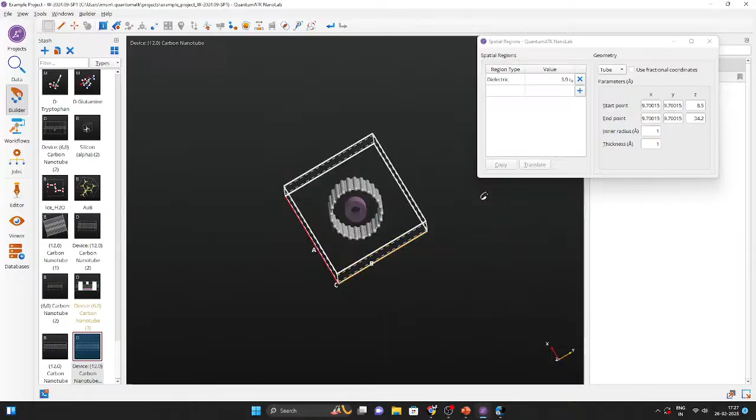If you want to increase the length here, you can easily define, like if I select the 40, now you can see. So I would like to go with the 43 something.

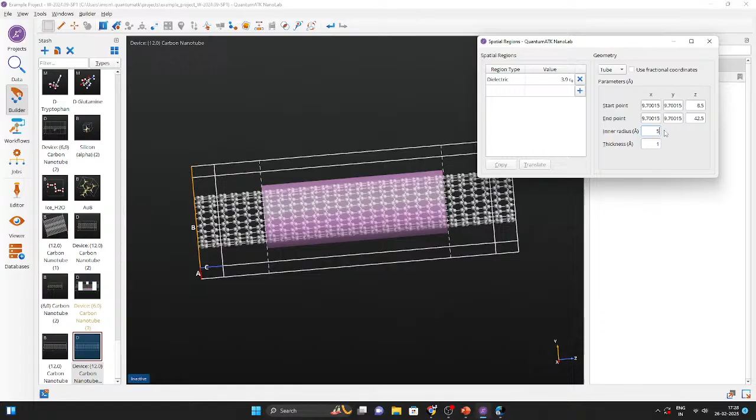Now here we need to define the inner radius. So I would like to take 5 angstrom. Now you can see. In the similar way, we need to define the metallic region.

So let me select a metallic region. So this is the metallic. Again, we need to select the tube. And here again, we need to define the starting point and the ending point for all the directions, X, Y, and Z.

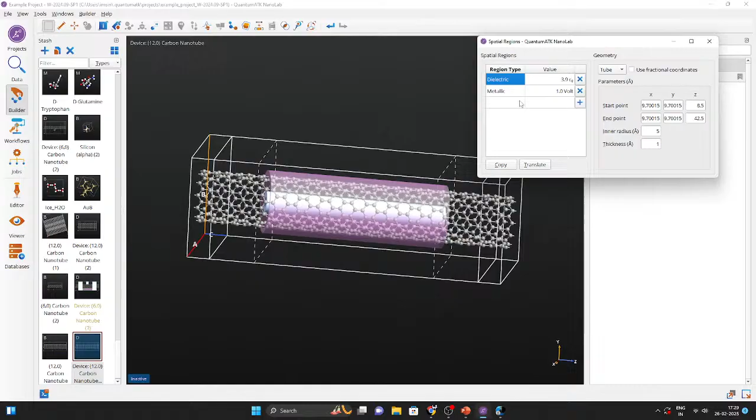So you can see I am putting all the same similar values. Here basically I need to change from 8.5 to 42.5, and then we need to increase the inner radius. So in the case of the dielectric substrate region, I have put it the 5. So in the metallic region, I would like to take 6 angstrom.

So let me cover the simulation that I have simulated earlier for the array nanotube, where I have simulated the IV characteristics and also the projected local density of states. So here you can see this is the device that we have simulated.

So similar device I have simulated. Now you can see this is the IV characteristics. So we have taken from 0 to 1 in the point of 10. Here you can see this is the plot type.

Here we have the gate to source. You can also go with the drain to source. And here you can see this is the current scaling: linear, logarithmic, symmetric. And also you can go with the electrode temperature if you want to enable. You can click on this enable and then you can simulate.

And if you want to calculate their scattering properties, you need to select this graph. You can click on this arrow and select, yes. Now you can see this scattering simulation has been completed.

Now we will go with the device configuration, and here you can see we have the polymer analyzer, molecular dynamic analyzer, and also we have the transmission spectrum analyzer. So this is the transmission spectrum analyzer for this device.

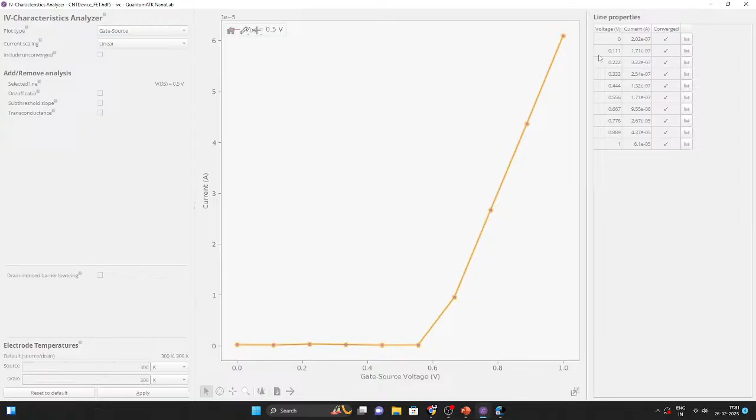Now you can see this is the transmission spectrum with respect to energy, and we also have the transmission spectrum with respect to coefficient.

You can easily calculate the spectral current with respect to energy. You can also change the chemical potential and the temperature on the left side and right side. You can see this is the spin value, and this is the spectral current with respect to energy.

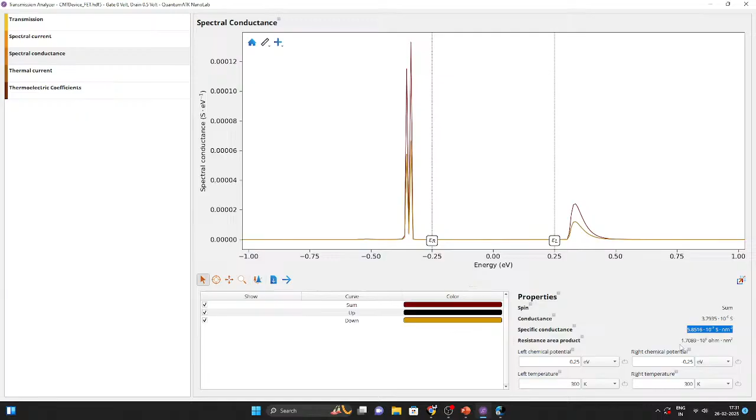Here we have the conductance value, specific conductance value, and also the resistance area product. This is the thermoelectric coefficient, like you can see conductance, and that you can easily simulate. Here you can see this is the Seebeck coefficient that we have simulated for this device structure.

So this way you can use this QuantumATK software for the device simulation, and also you can use it for the material simulation. And if I show you the help option, you can see this is the help.

Here we have the QuantumATK manual. This is the tutorial. We also have the open document and tutorial. You can type QuantumATK. Here you can see this is the QuantumATK documentation. We have the tutorial, we have the manual, and we also have the publication papers.

Now I have shown you how you can calculate the nanotube device structure, like the array of the nanotube and also the GAAFET structure. So if anybody has any query regarding this particular session, they can unmute the mic and ask me the question.

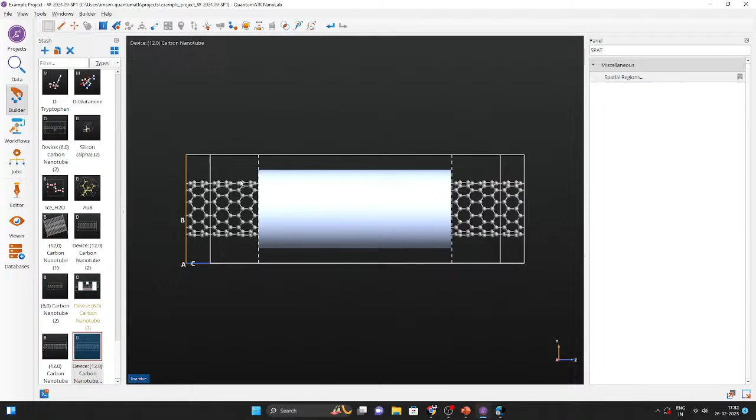Hi, it is a good presentation. I have a small question. How to twist the geometry? Yeah sir, that we can twist. Let me go to the data. This is the builder, so let me take this carbon nanotube, a single carbon nanotube, this one.

So we have all the options, either twisting or rotating. How long will it be twisted, meaning how many nanometers it is twisted. Is it a sudden twist, or is the twisting gradually increasing with respect to the length? Could you provide basically, for rotating or twisting, we need to define the angle.

If you want to go with 90 degrees, you can see it has twisted 90 degrees. Okay, it means it is sudden, creating a twist basically in the Z direction. You can see, it means from one end to the second end there is a 90 degree twist overall that length.

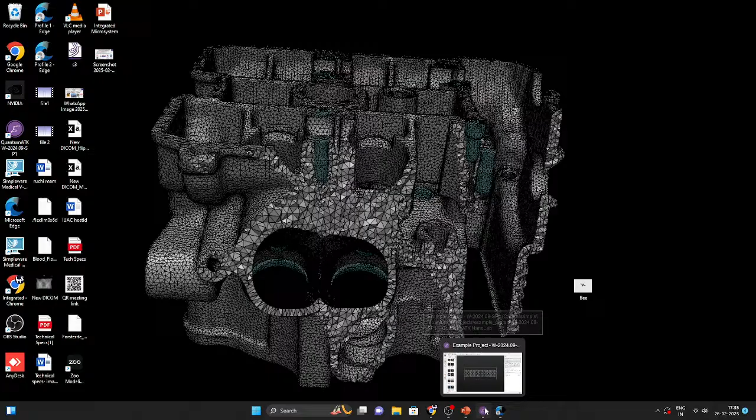Deepak, I have a query. Yes sir, tell me. Say suppose we have a graphene layer, okay, and we do some sort of modification on this layer. Now if I want to find the change in the work function, or maybe the work function of this new layer, can that be done?

Yeah sir, that can also be done. Let me go to the tutorial part. So we have all the tutorials regarding the work function, devices simulation, material simulation. You can see we can tune the work function for any of the devices, any of the materials.

Okay, thank you. So I will also share the document and tutorial link, so you can also follow that. Sure. Whenever you get the time, you can visit the site, then I hope you will be more familiar about this tool.